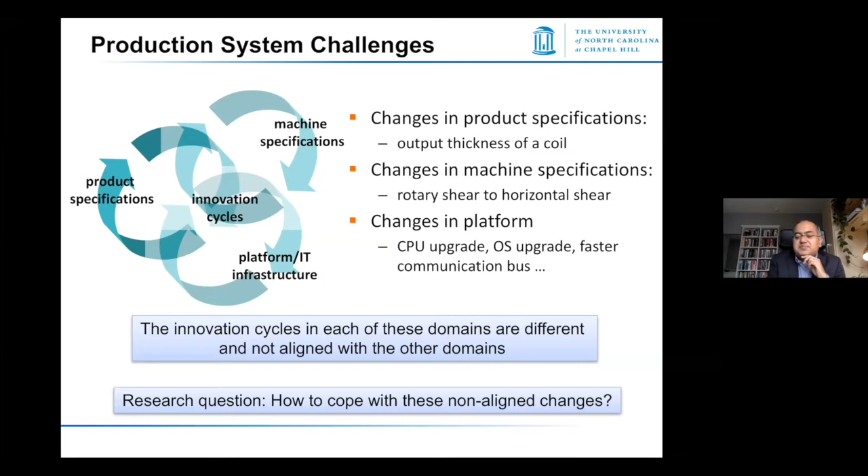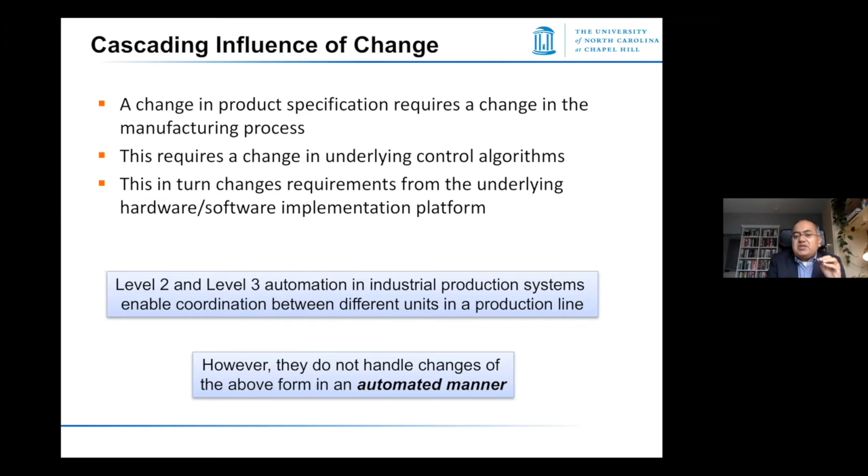In the industrial automation or production domain, there are level 2, level 3 automation techniques that are defined that enable this coordination between different units of the production line. But as this entire system becomes more complex, not just from the IT side but also from the machinery side, one of the main questions that the industry and also the academic research community is facing is: how do you handle these types of changes in a purely automated manner?

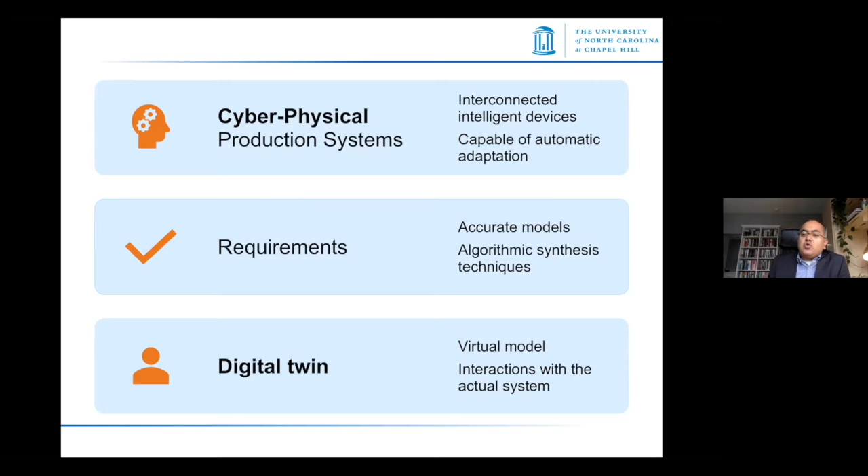This is what brings us to the concept of cyber physical production systems, where the picture is that we have a number of now interconnected but intelligent systems that are capable of automated adaptation. And what I would like to argue is that in order for this vision to work, you need accurate models, accurate timing analysis techniques, and algorithmic techniques that currently today do not exist.

So coming to the first problem, I don't think I need a big motivation to explain that for such a system to work, the underlying core of many of these systems are feedback control loops, where you have a plant, which in our case is now a machine that has to be controlled in order to achieve a certain production goal.

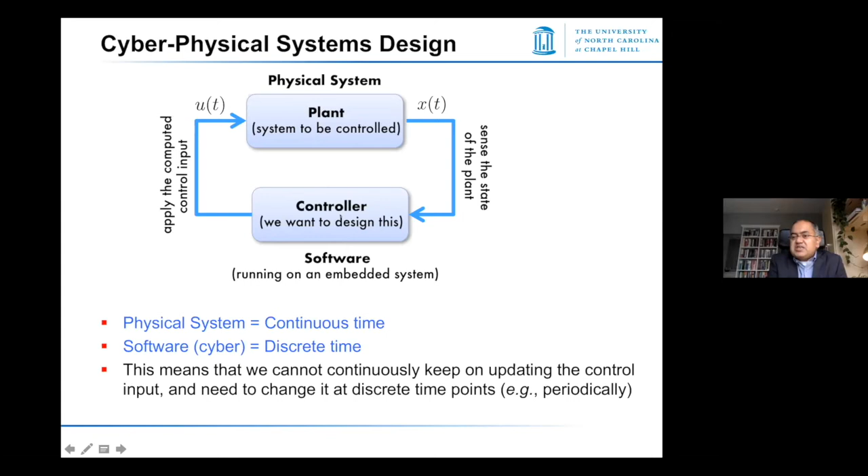I guess all of you in the audience know that such a plant is the physical system. On the other hand, we have the controller, which is a software entity running on the IT platform. The obvious disconnect between the two is that the plant works in continuous time and the controller works in discrete time. How do you reconcile this difference between a continuous time evolving plant and a discrete time evolving control?

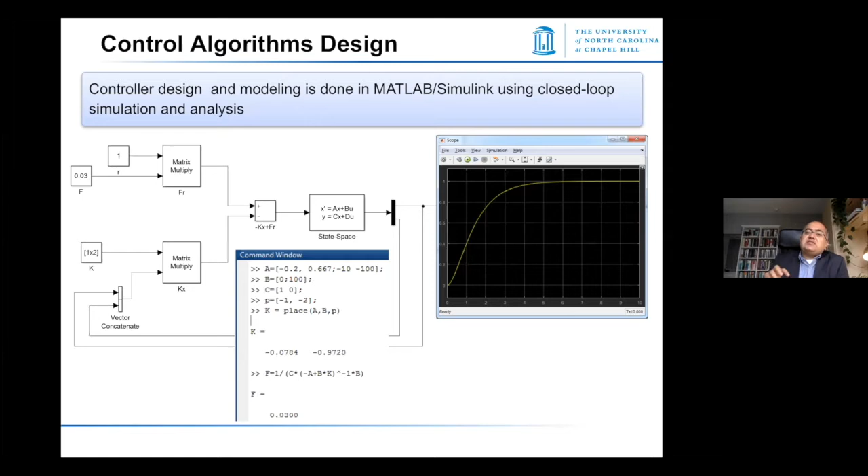Typically, we use standard control theory, and there are lots of associated tools, common among being MATLAB and Simulink, that you use to design your controllers. But whenever this controller is designed, it is often the case that for the control theorists, there is little view on the complex IT platform that exists today.

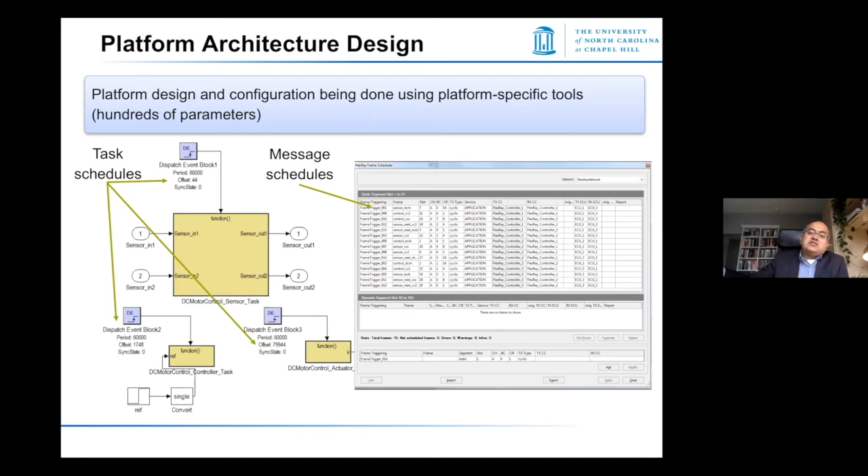As a result, there are the embedded systems engineers and the software engineers who design the IT platform, and they do this design process independently. Finally, in the last stage, when the controllers are integrated with these IT platforms, a lot of the idealistic assumptions that were made about the IT platforms by the control theorists do not hold true.

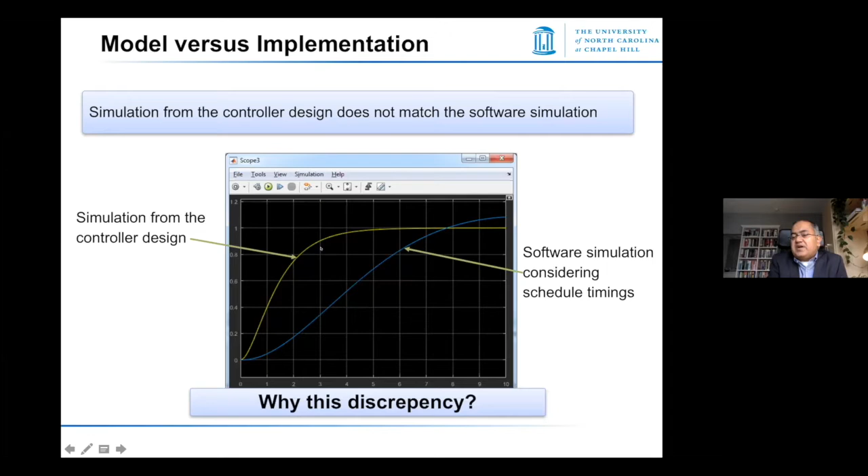For example, during the controller design phase, one might have assumed ideal timing behavior, but in practice, especially for complex IT systems, those timing behaviors are far from ideal. We see this discrepancy between the controller design expectation versus the performance we see in reality. This is a problem because of the modeling gap between the models used when designing the physical systems and controllers, and the actual models that exist in reality.

One of the ways to cope with this modeling gap is that one could have a partially specified controller and a partially specified IT platform and do some sort of co-synthesis. But to do that, we need detailed timing information of the IT platform, and I'm going to illustrate why that is a big challenge today.

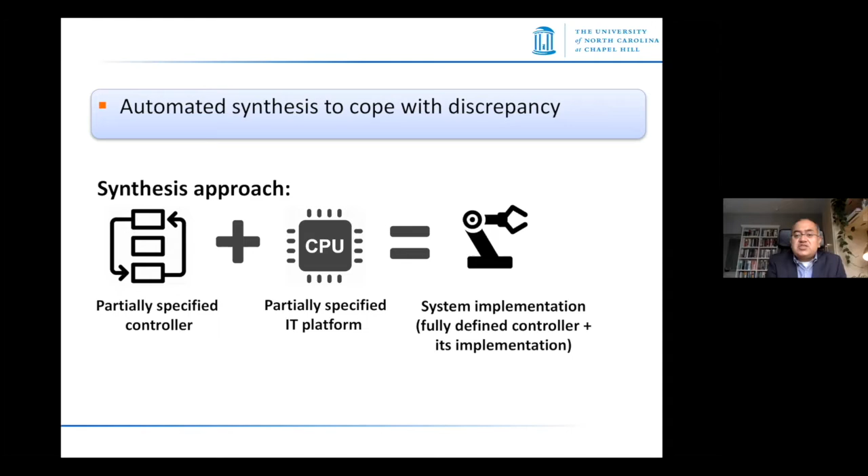In almost any automated and especially intelligent production system today, there is the following setup: we have a camera detecting the state of the system, and based on that state, you take a control action. This camera image has to be processed through an image processing pipeline, which today almost invariably contains some machine learning techniques. Because of their computational complexity, they cannot be processed in real time purely in software, so you have a lot of hardware accelerators like FPGAs, GPUs, etc.

Once this processing pipeline is over, a decision is taken and applied to the machine, which then goes ahead. This could be a robot arm picking something up, or a machine doing something, but its action depends on what the robot sees about the environment through a particular camera. So the correctness of this entire system is not just functional correctness, that the robot arm moves in a particular manner, but also that it moves at the right time.

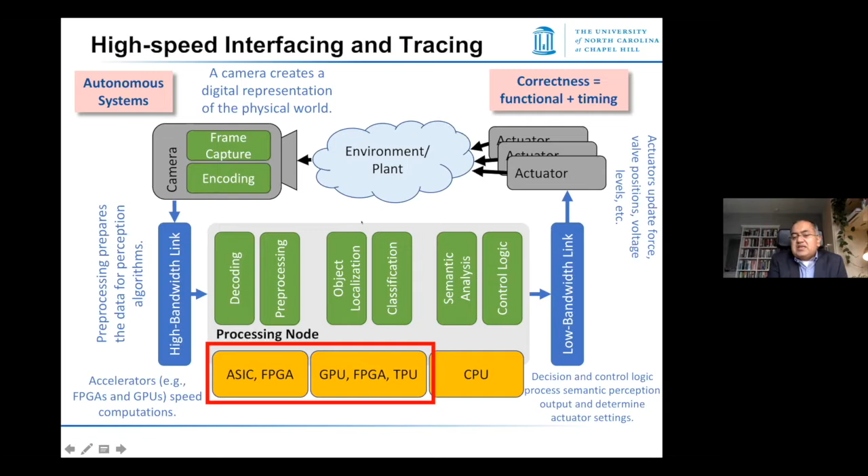If I play this video, you will see there is an Ethernet camera which processes frames at a very high frame rate of 178 frames per second. This cannot be done at this rate using purely software, so you have a large array of complex hardware accelerators.

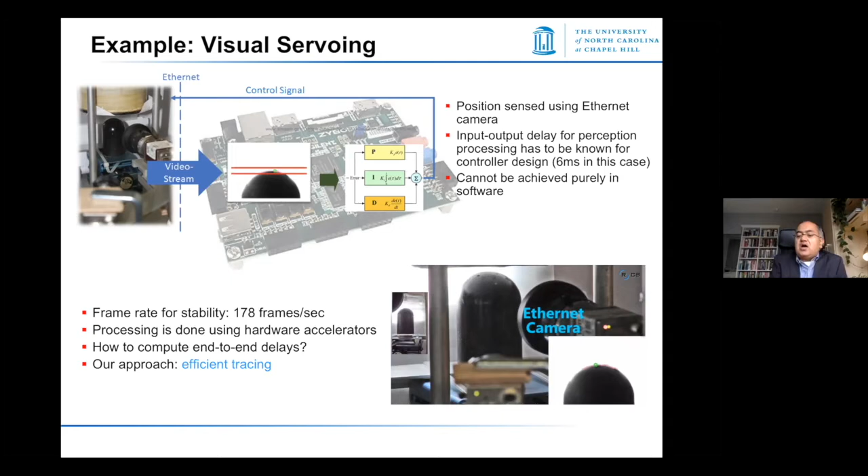The main question is that before you take the control action or design your controller, you would like to know the end-to-end delay between the time a frame is captured and the time a control decision is taken, where the system has estimated the accurate position of this levitating ball.

The processing in this case, although a relatively simple platform, is just a system on chip platform where you have a processing element and an FPGA. The main issue is that the data comes over this Ethernet port, and then this data has to be routed through multiple interconnects to the programmable logic, which is this FPGA fabric.

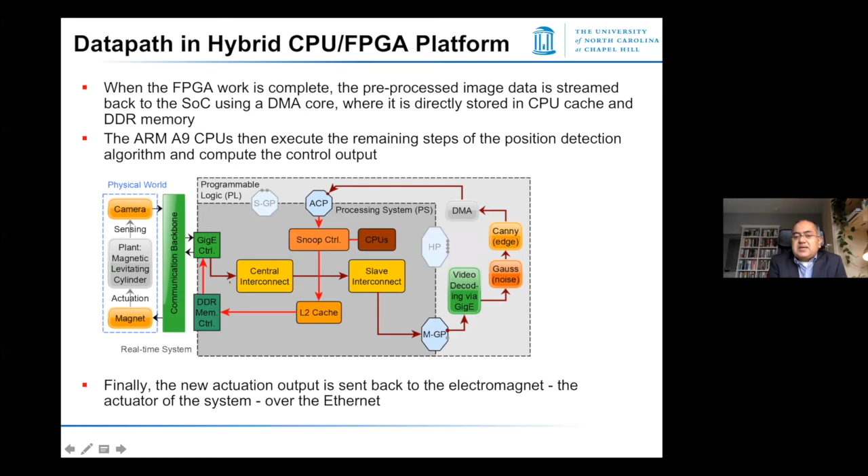In this FPGA fabric there are multiple algorithms, for example a Gaussian noise eliminator, a Canny edge detector, and so on. After this processing is done, the data goes back to the SoC, where the remaining processing steps are executed, and finally the actuation output is sent back again through this port to the electromagnet.

Now the issue is how do we estimate the accurate timing from the time the Ethernet frame enters to the time the output is reached here and goes into the controller. If you take a closer look at the system, there are really many things going on, but more importantly, even this relatively simple control task actually involves many tasks spread out across this heterogeneous system.

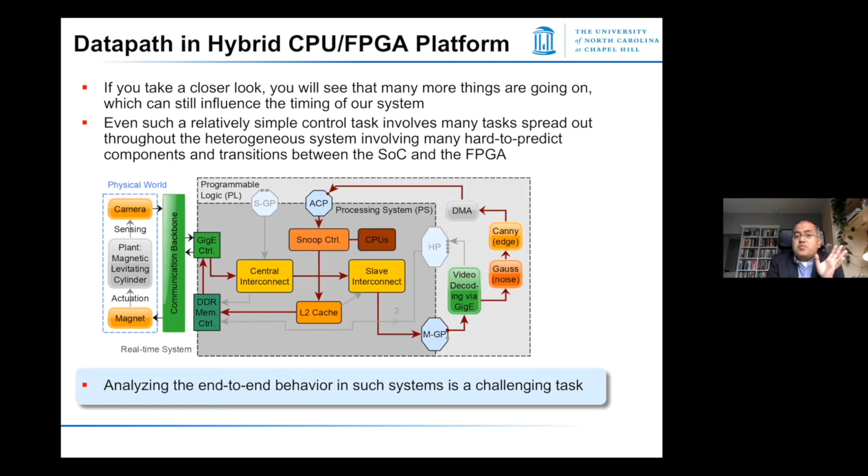There are many hard-to-predict components as a result of this transition between the system-on-chip platform and the FPGA. We've done some work on how to resolve this. There are design tools in FPGA design available to trace these details, but one of the main problems is that this tracing happens at a very low level of abstraction. As a result, a lot of data is generated, and you cannot monitor such a system for more than a couple of seconds.

But the main issue is that you might be interested in a much higher level of abstraction. You might be interested in only certain events. Currently there doesn't exist any tracing method where you could define those events and just monitor those particular events of interest, and as a result, monitor the system for a long enough time.

Of course, you cannot analytically or mathematically model all of this and do accurate timing analysis. One technique we've come up with is to put in a trace core, a very small part of this FPGA fabric, where you can define the level of abstraction at which you need to monitor things, and monitor only those particular events at a very high level of accuracy, as you can see on the right-hand side. You could get detailed timing information of particular events of interest, and use this information to get timing data that can be used to run your control algorithm.

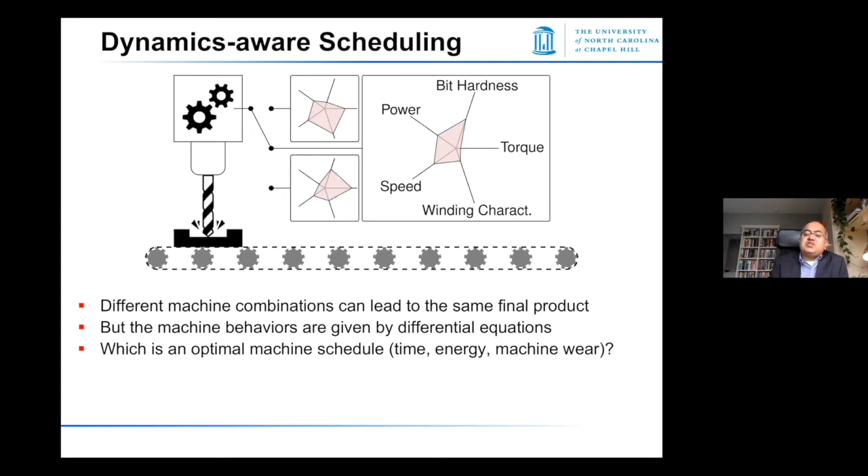As a result, we have the following scenario: we have M1 to Mn at the different machines. This is at stage 1, again the same machines at stage 2, and again the same machines at stage 3. All we need to do is start at a particular machine, say M1, and at the next stage decide what is the next machine, and at the next stage decide what is the next machine, and so on until we have the finished product.

The main issue here is that the processing in each of these machines is defined not just by execution time parameters, but by a set of differential equations. So given this space of different differential equations controlling the different machines, the problem is how do you determine each of these mode transitions such that you reach the final state, which is the desired state of the product, and optimize metrics like total processing time, total heat generated, or energy consumed, and so on.

Now, this is a classic hybrid systems problem, where you have multiple continuously evolving states and discrete transitions between them. Very easily, depending on what kind of differential equations you have and what conditions allow state transitions, this problem becomes undecidable. So one possible solution is that you discretize this entire space.

And of course, in order to accurately capture the system, you'd like to discretize as fine as possible, but then that results in a state space explosion. Whereas if you discretize in a very coarse manner...

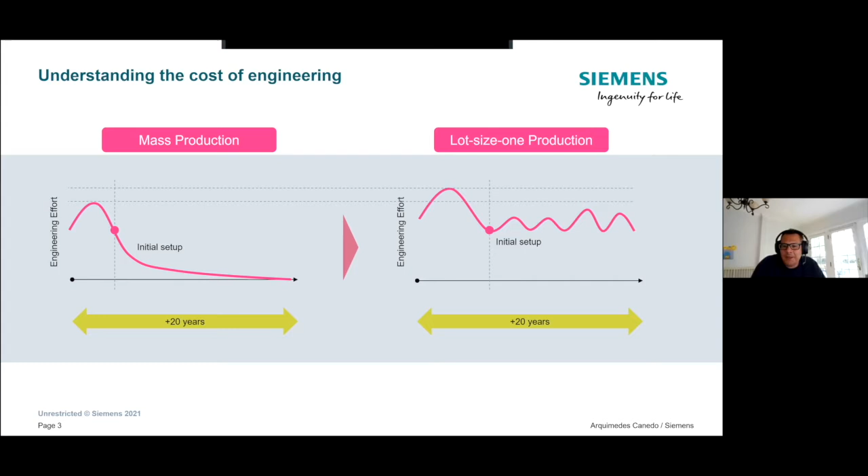We hear about digital twin, sensors feeding back all that good stuff to design and optimization, but engineering is as important as the product itself, as the runtime. So just to illustrate this, we typically think of digital twins from the product point of view. Think of it like a watch. Yes, we can digitally create and test products, and we only think of that product, in this case the watch, once it's being used.

But I think where really the power of digital twin gets unleashed is also that we can digitally model and create these production systems, and see all that monitoring on the machines themselves that are producing that product. So we like to see it as this horizontal axis where you have the product and the production digital twin that, in a way, intersects the product. And only when they intersect is when the production creates that digital product.

I think the important thing here is that the same loops that we see in product, on optimization and improvement, we can see them in production. But more importantly, one of the points I want to make is that the interplay of the two is something that you don't see very often discussed. So the choices that you make, especially if you're creating one-of-a-kind products, the production machine needs extreme flexibility and adaptation, and we need to engineer all that stuff.

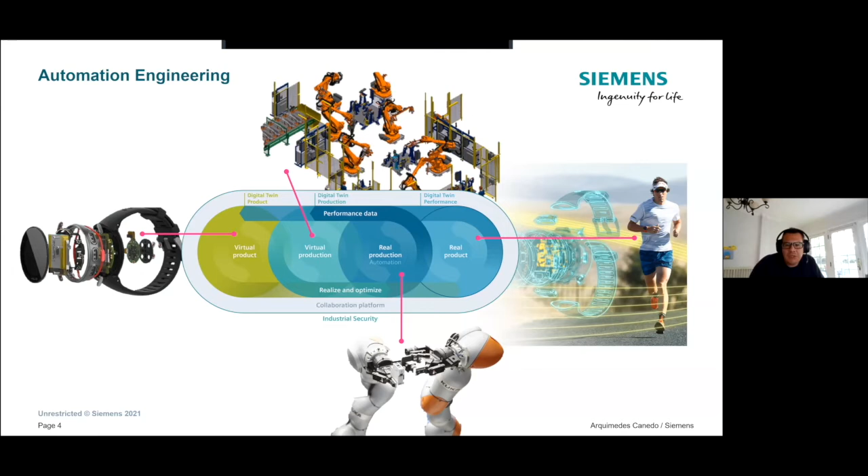So just a glimpse of where we're at today, and this is a little bit to talk about the problems. I just put pictures of many of our tools that let us create both product and production digital twins. Now, obviously there are integrations between them, but we are working, and this is the challenge not only for Siemens but for everybody else, to start creating more interoperable digital twin creation tools.

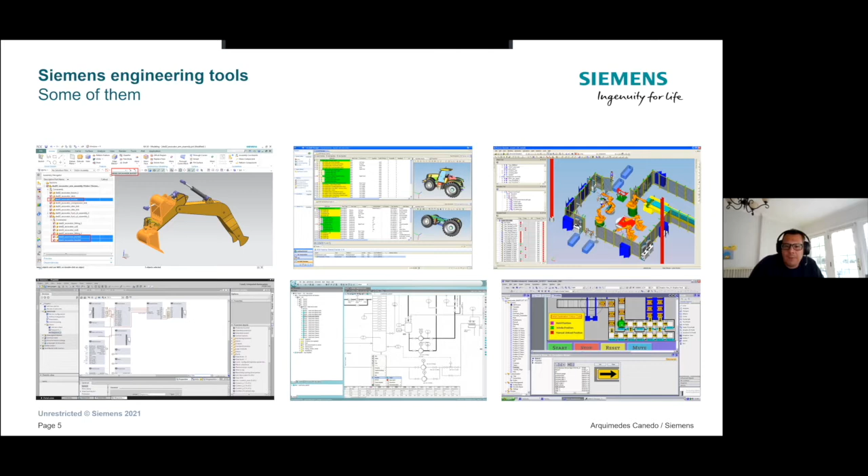So here, what you see on the screen is all engineering. We're creating stuff, we're preparing both the product and the production. But as we discussed before, the cost of engineering is very high. So what we've been doing for the last 2 years is something that we call cognitive engineering.

And here the idea is the use of AI, artificial intelligence, and here not only machine learning but also formal methods and other forms of AI. The goal is to reduce the engineering effort. It is costly, it is difficult, and we want to address that. So what we've come up with are proof of concepts, and this is just one of them.

We call this the ArduCode. The idea here, what you see in the middle, is this proof of concept that we created is attached to our tools on the left, that's for PLC programming, and on the right for production scheduling and simulation, production planning.

And here, the cognitive engineering system in the middle is constantly monitoring different projects that we've created in the past and picking up patterns, all driven by a knowledge graph or a knowledge base. And what we're trying to do here, and we've demonstrated that it can be done, is code classification, trying to reuse code based on functionality.

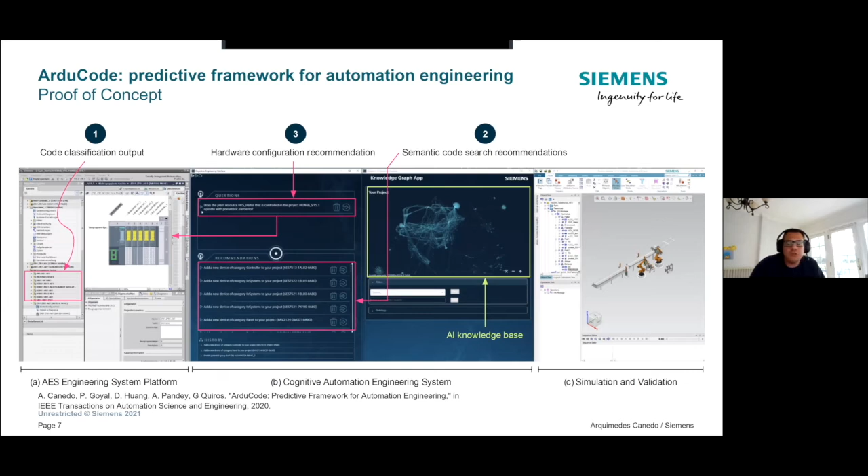Number two, semantic code search recommendations. If you see a hardware pattern being implemented, you can associate this piece of code that controls it. And third, the hardware configuration. For example, the use case that we have is that if, because of the structures, you detect that this requires a higher safety level, you can recommend an additional PLC to cope with that requirement.

Also, very importantly in engineering, we have an aging workforce. That happens all the time. We're humans, we only last, if we're lucky, 80 years. But as our engineers retire, we need to train the new generation. Capturing that engineering knowledge is critical. That's what makes the difference between an experienced, proficient engineer and someone you just hire from university or school. So what we've been studying is that as engineers create structures in the engineering tools, we can mine these structures to predict what makes the senior engineer more efficient and more knowledgeable than others, and capture this pattern so we can recommend it later to newcomers.

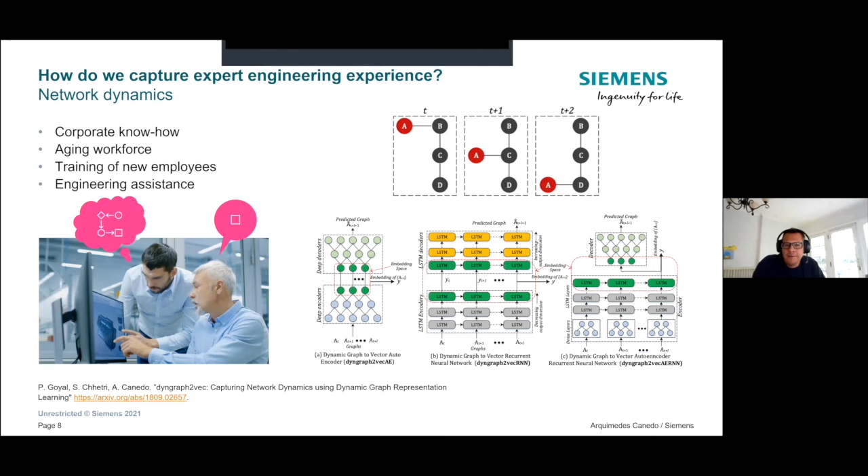So with that, I'll close up, and I want to emphasize three key takeaways. One, engineering accounts for about 50% of the total cost of automation, so it's as equally important as the runtime. Two, please pay more attention to engineering. And three, as you pay attention to product digital twins, start paying attention to production digital twins. Thank you for listening in, and I'm looking forward to the discussion.

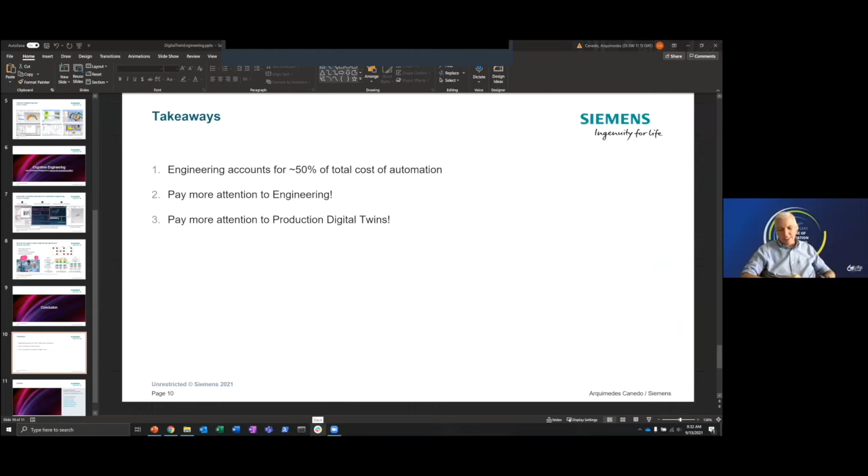Thank you, Aki, for also this very nice perspective on how you do it in industry. And now finally we go to the next panelist, Franco Fummi, who also worked in this digital twin area with production systems. We have also a short lab visit, but I will not say so much because Franco, this is your turn, so you can already start.

Okay, thank you, Achim. So my presentation is about a research facility for Industry 4.0, where at the core there are digital twins, as you will see in a demo that we will do at the end of my presentation, a live demo.

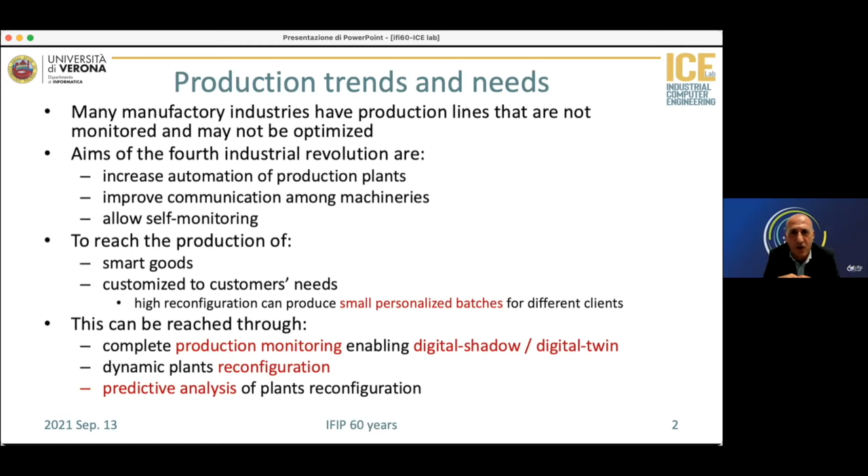What can we say about the flow that produced the digital twins I will show you? If you consider production trends and needs, we can see that the current production trends and needs are sensibly different from those of 10, 20, 30, 40, 50 years ago. Particularly, we can consider that all goods are now produced in small personalized batches, no longer in large unpersonalized batches. So it's fundamental to create correct monitoring of production, and this could be enabled by using a digital shadow, which is a particular kind of digital twin. Particularly in the case you are able to dynamically reconfigure the production, this dynamic reconfiguration goes in the direction of having predictive analysis of plant reconfiguration, which is a topic on the border between Industry 4.0 and what is already called Industry 5.0.

But first, let me say something about what we succeeded in putting together in our research facility. We started from all the typical enabling technologies of Industry 4.0. We realized that all these technologies are based on computer engineering, but computer engineering is not exactly what there is at the core of the majority of production plants. We find there a lot of different engineers - mechanical engineers, control engineers, electronic engineers - but not a lot of computer engineers. And particularly, all the methodologies used in computer engineering in past decades for designing software and systems must be applied in the context of industrial computer engineering.

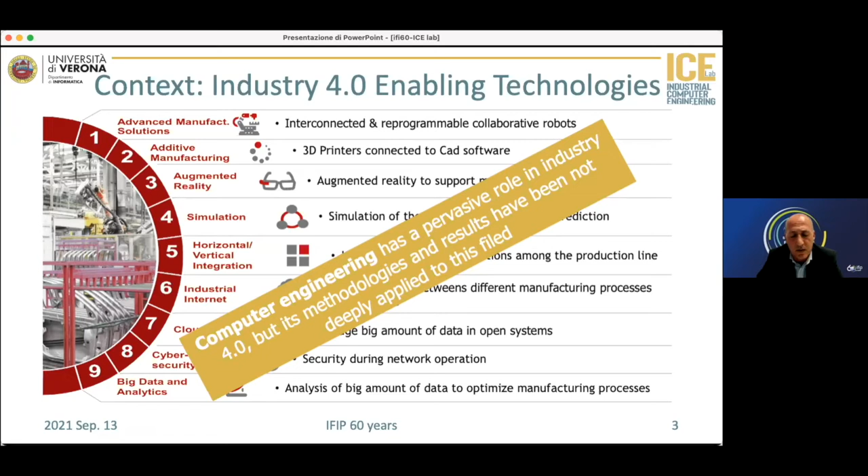So the target, goal and mission of the laboratory we created is exactly to try to identify a way to port all such methodologies and knowledge into industrial computer engineering. We succeeded in doing it only because we received huge funding from our education, university and research ministry - 8 million in funding - and this has been used for some activities, but also to create a laboratory.

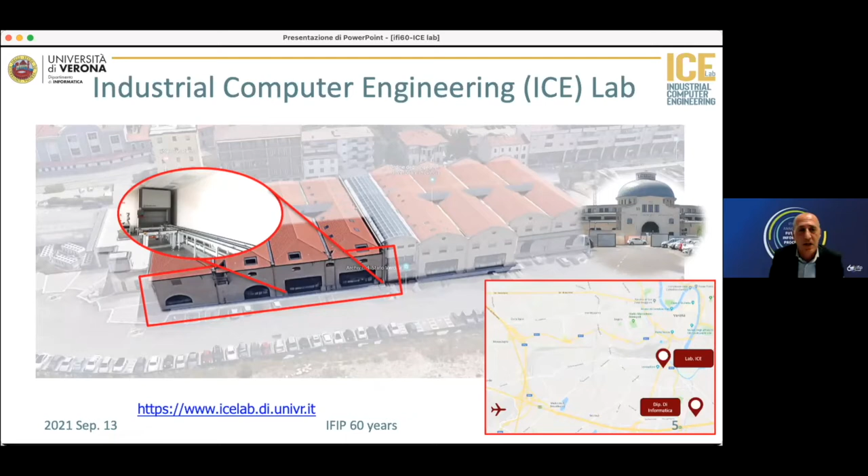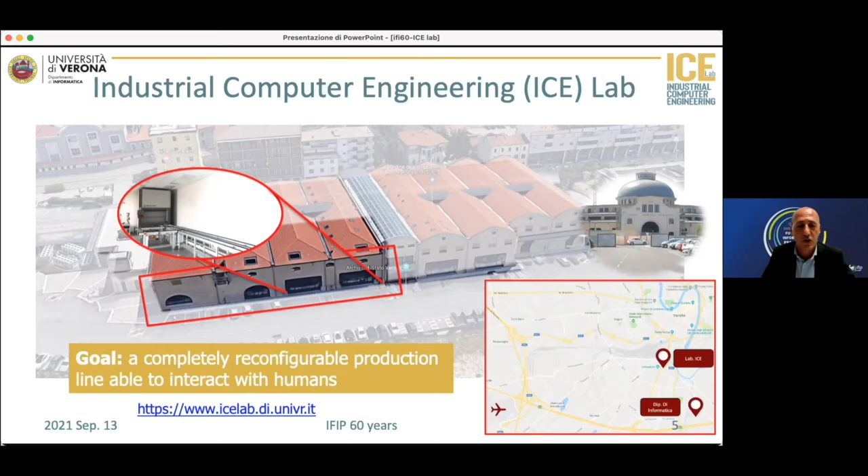The laboratory is called ICE, Industrial Computer Engineering. Here is the website if you are more interested in the content. And the goal is to create a completely reconfigurable production line, be careful, able to interact with humans - this is the new frontier, interacting with humans of Industry 5.0. It is exactly what we are going to do in the next years, after the first stabilization of the production line that will implement all the main characteristics of Industry 4.0.

And the interesting thing about ICE is that it is a so-called demonstration lab. So what is a demonstration lab, and why could it be a bridge between academia and industry? Because a demonstration lab shows the state of the practice, and the state of the practice must be there. But then, on top of the state of the practice, we are doing teaching, so we are doing specialized teaching, and we are doing research.

So it is a real need of companies to identify an intermediate position between the direct offer of companies like Siemens, for sure, and the ideas of universities. The ones from companies are focalized to the target project and so on, and they are perfect for sure, but focalized to one direction. The ones of the universities are, in the majority of cases, proof of concepts. So we need to identify an intermediate point.

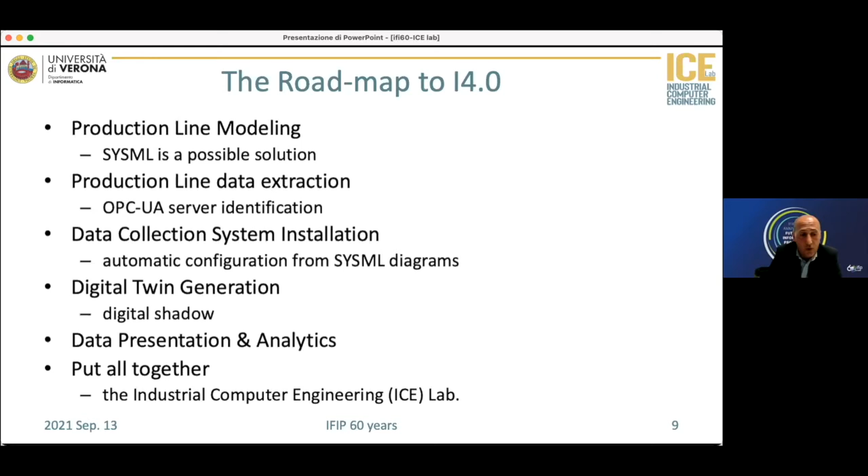You can also extend in the future your digital shadow to become a digital twin. Then for sure you have to present data and perform analytics on top of them. If you put all together, you arrive at our industrial computer engineering lab.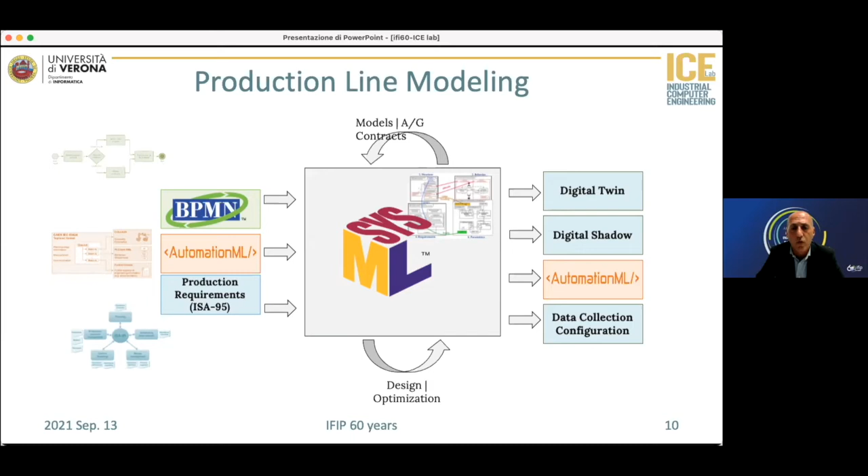From this, we can start to automatically or semi-automatically generate the pieces of the roadmap I showed you before. For example, in the case of data extraction, you have to solve the problem of different protocols. You have to mix together what we know as IoT with industrial IoT, which is a different flavor more related to industrial production. You need, for sure, a gateway.

But if you don't want to go crazy, you need an automatic way to generate the data structure in order to collect data, to arrive at an architecture that should eventually be cloud native, so you can move it from your PC to an industrial PC, to a large PC, to a cloud, without being constrained to redesign all the software. In the case of data collection architecture, a good idea is to avoid putting all data into the cloud.

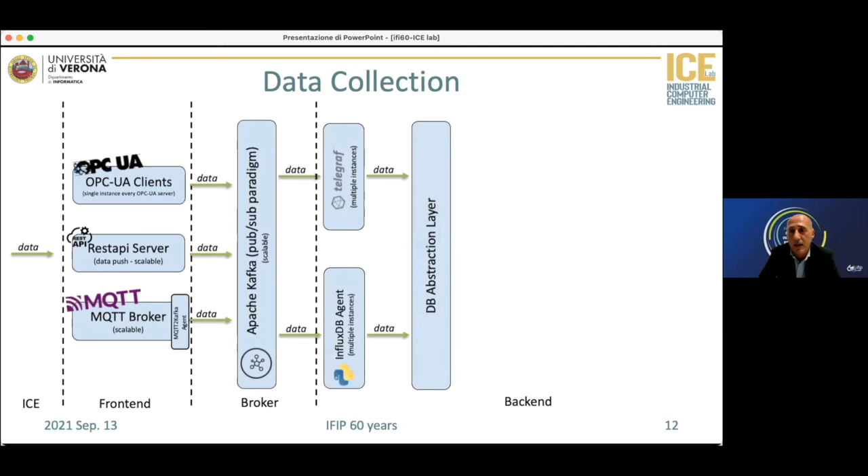You can do it, but it costs a lot and it's useless. You have to identify different layers, and in those layers, remove useless data. You unify the data from different sources, and then when they are ready, you can put them into your favorite cloud. On top of this, you can model your digital shadow.

We use, for example, the typical simulator from Siemens to perform this. We extended it by mixing different levels in order to have different digital twins, because sometimes we use the term 'let's generate a digital twin,' but there is not only one digital twin—there is one digital twin for each problem.

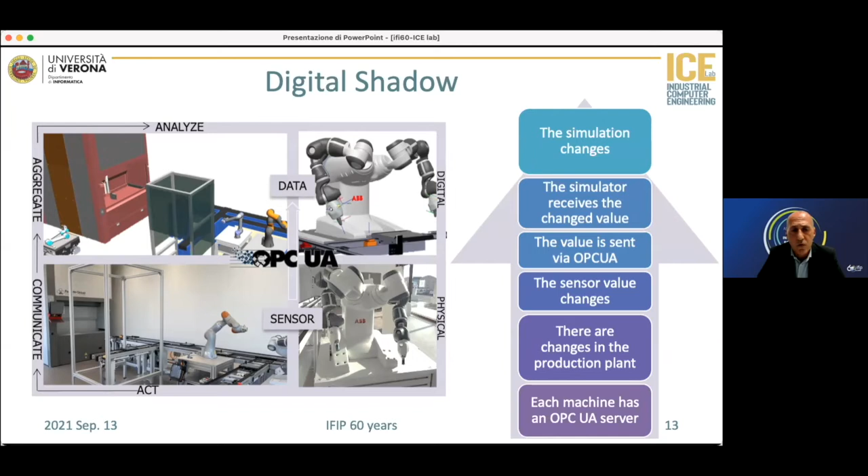Depending on the problem you have to solve, you need to identify the correct level of abstraction, the correct set of data, the correct computational model, and so on, in order to identify exactly what you would like to simulate. At the end, you have to collect all the data to present it with some analytics tools.

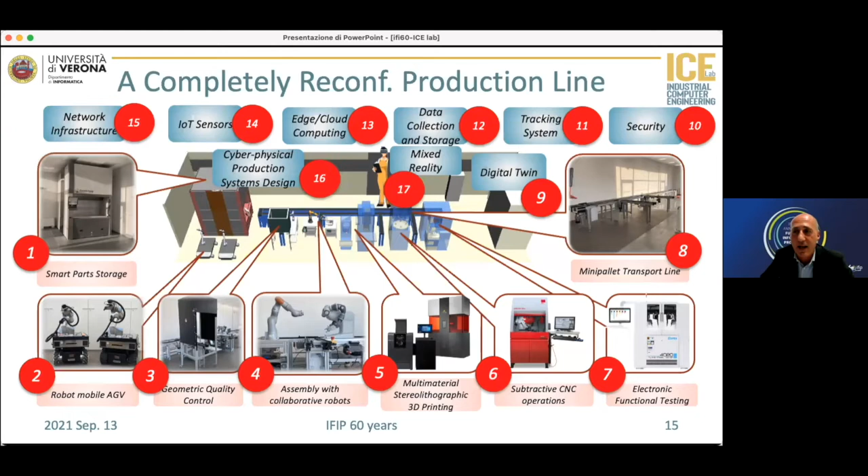With this slide, which summarizes the laboratory, I would like to pass the word, the token, to my colleague in ICE Lab in order to show directly a live demo of what we have.

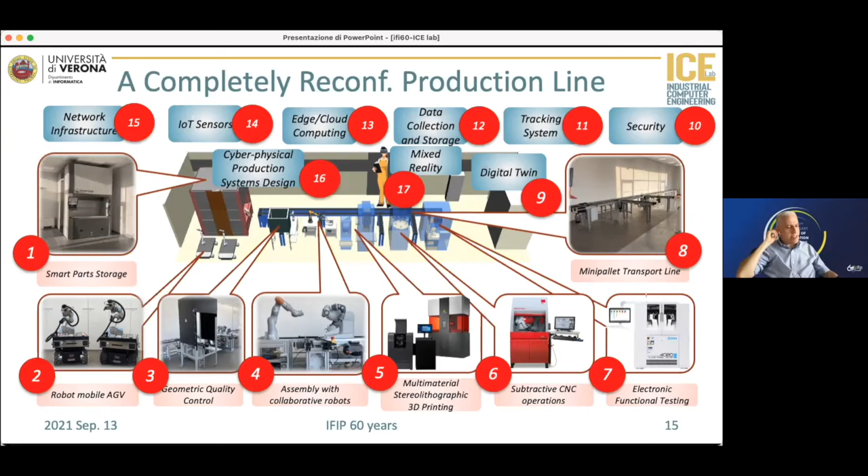Okay, welcome again to the ICE Laboratory. Before I show you the digital twin of the lab, I'll show you a real brief tour of the real lab. We have the lab divided into working cells.

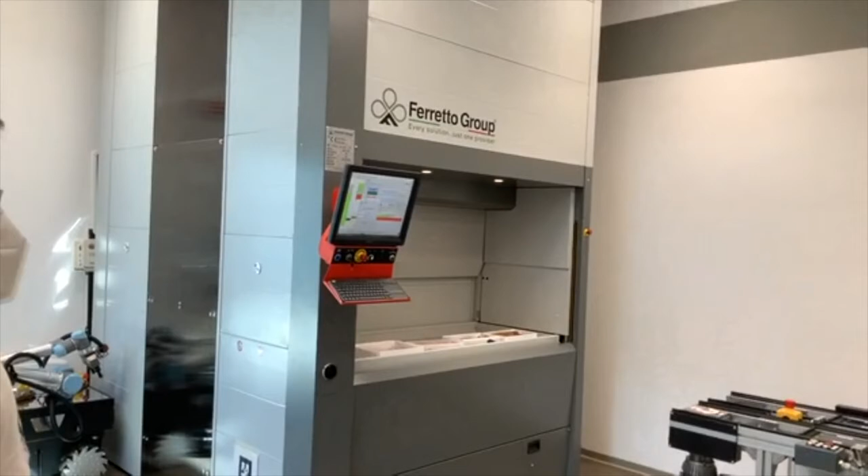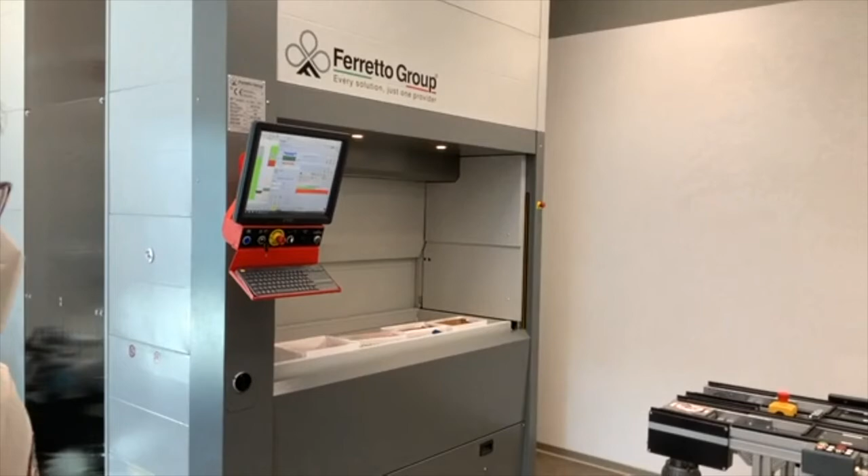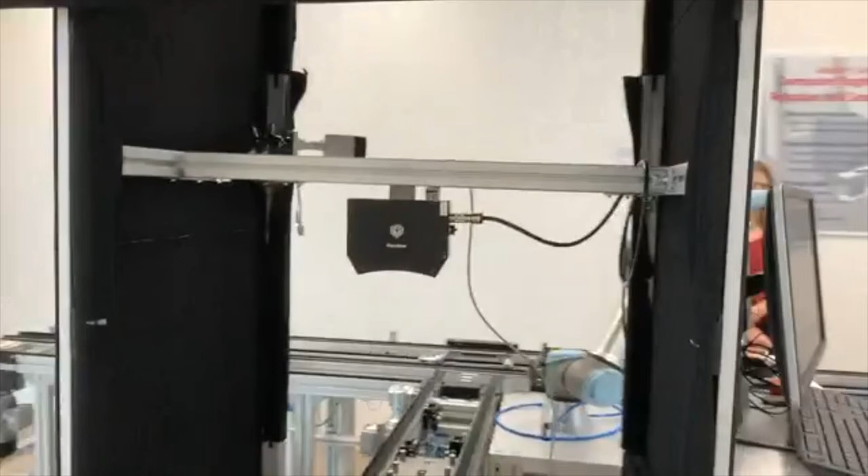The first one is the Ferretto warehouse that we use to store our production pieces and the pieces we need for our work in the laboratory. Then we have the transportation line, which is a mini pallet line in conjunction with a smart mobile robot. Then we have an optical quality control station, made up of cameras and a powerful PC.

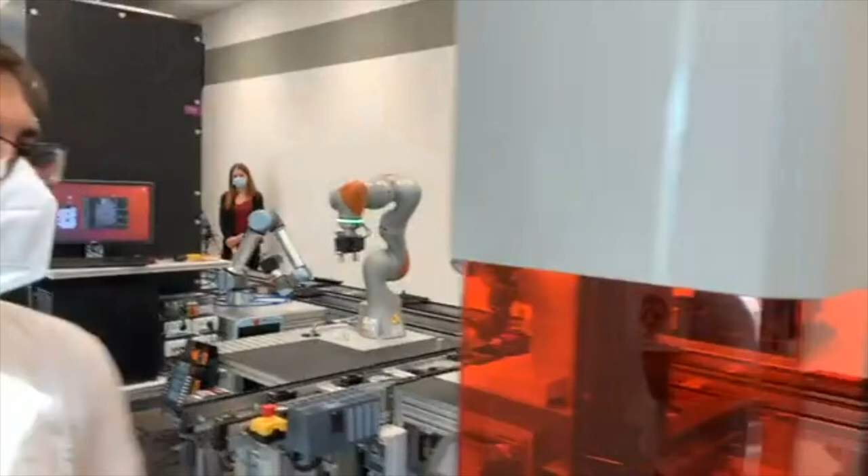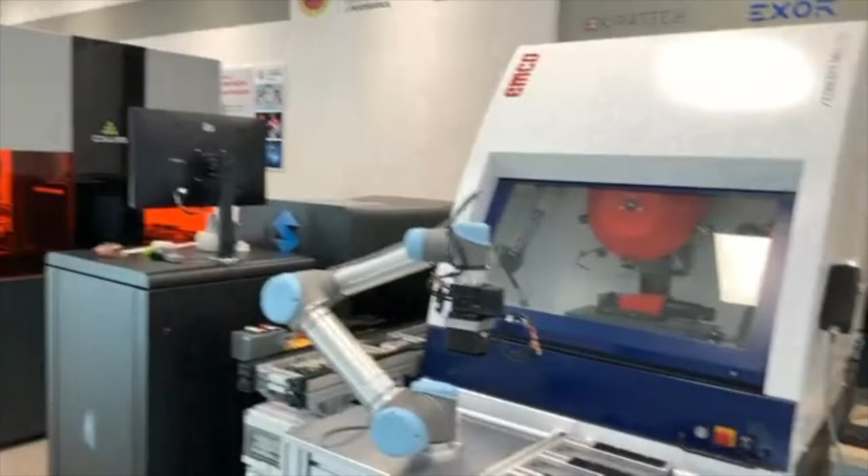The robotic assembly and disassembly station is working now, doing our recipes. Then the 3D printers—we have two of them with different technologies. The subtractive manufacturing station is a milling machine in conjunction with robots, which we are working to integrate into the laboratory.

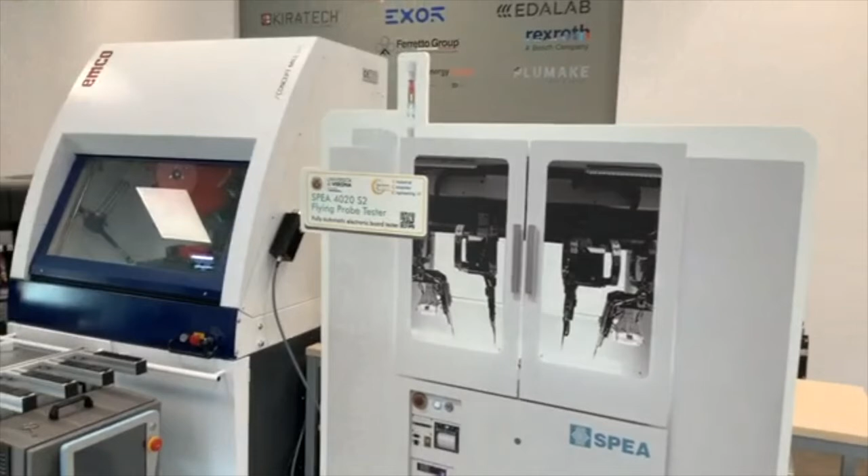And then the future part of the laboratory: the flying probe tester, to test and do automatic board testing—something we will do in the future.

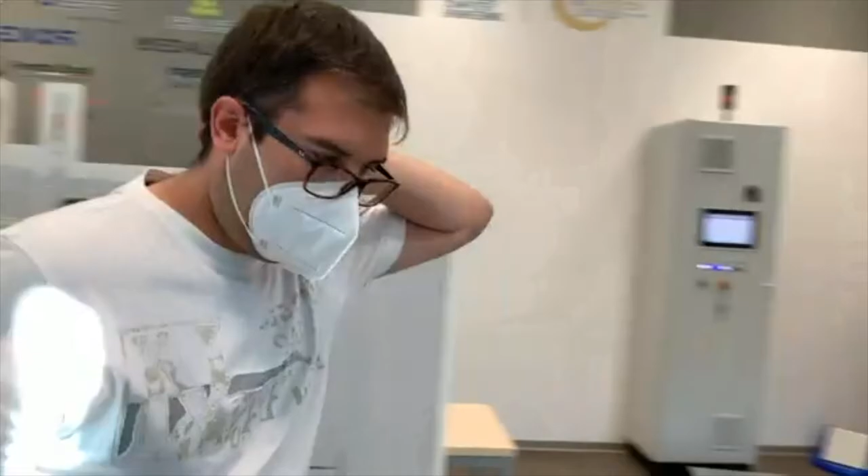I'll show you the digital twin with a screen share. Okay, you should see on your screen our digital twin. The digital twin shows the data flowing from the production line.

For example, on the warehouse, you see the current tray that is on the bay. From the optical quality control, we see the last event, which is a correct quality control. From the robot, now you see an empty cell, but when the robot places the Lego pieces in their buffer area, you can see the state of the cell. Finally, you can see the mini pallet flowing on the line, in its state and in its position.

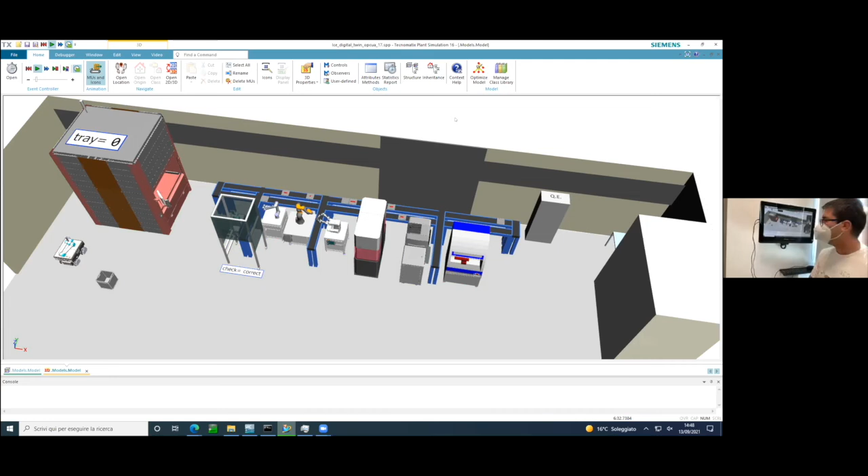Our digital twin reacts to changes on the line. For example, I can show you, if Marco is going, that if I stop this mini pallet on the digital twin, there will be a waiting, and the pallet at the end of the line doesn't come up. Then, when I release the pallet, the digital twin shows exactly the pallet flowing on the line.

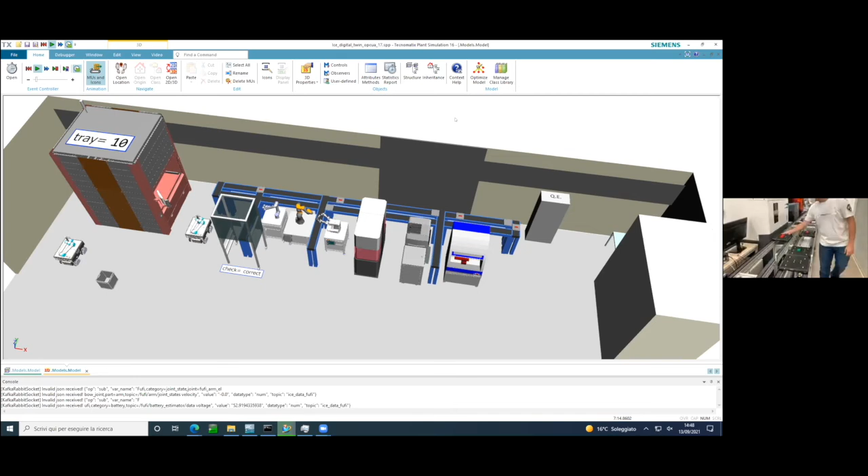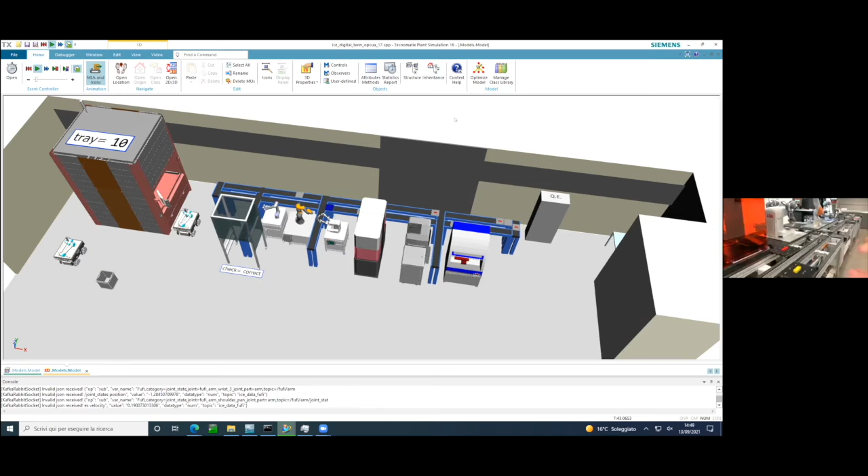But also, if I extract the pallet from the line and put it at another point, you will see that the digital twin shows up a blue pallet. Then, the first time the pallet reaches an RFID sensor, the digital twin recognizes it and inserts it again in the line with its contents on top. Okay, you can see in the digital twin that the pallet switches from blue to the normal state.

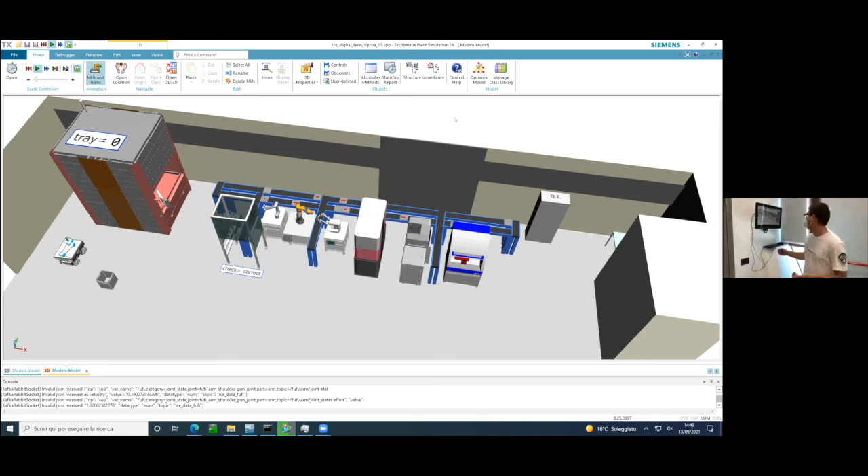This is possible because all the machines we have in the lab have an OPC server from which we can collect the data, and we can use it for controlling the plant. Also, the data collected from the machines flows into our data collection architecture, which we use to store the data.

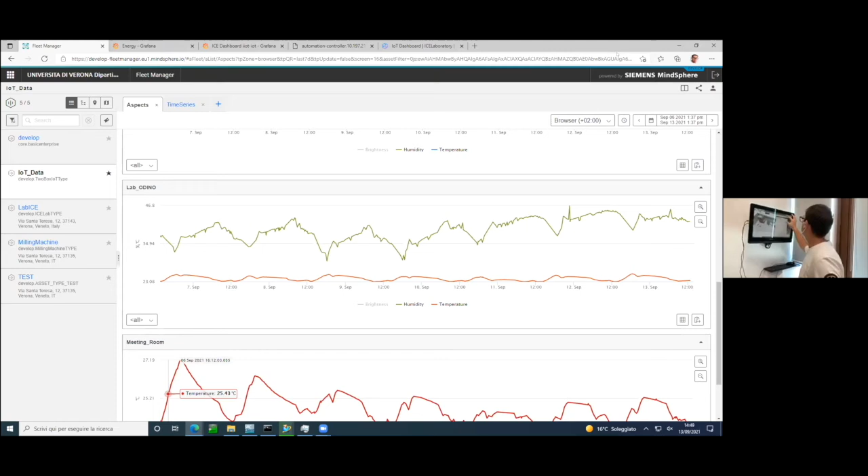Can I reduce this? The zoom bar is over the tabs. I have a problem with the zoom bar. Yeah, no worries, let me extend it.

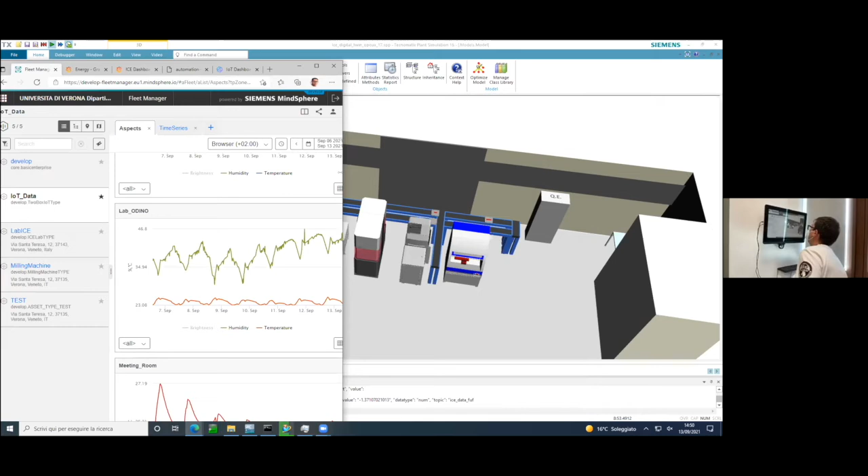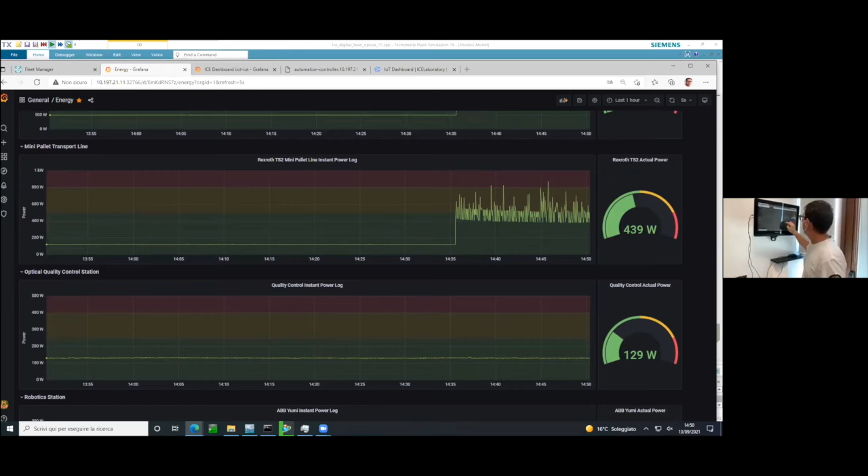Okay, so here we can collect the data and show you some of it. Here is a dashboard showing the actual power used from the ICE laboratory and from each of our controlled, connected machines. Then I can show you another dashboard where we mix the data from the environment and from the plant.

For example, we are showing the data of the ambient environment, where we show the illumination of the laboratory, the temperature of the laboratory, and its humidity, at the end of the production line and at the start of the production line.

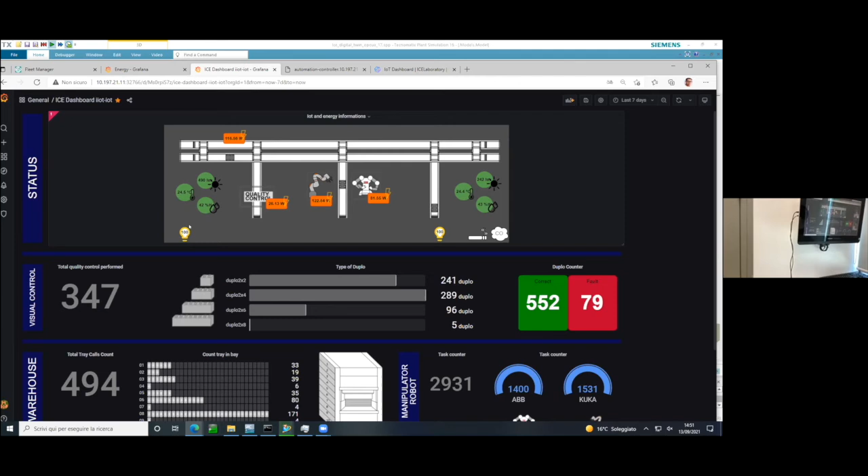Then we can show in real time the consumption of the pallet line, the quality control, and the two robots. And this is the state of the ambient lighting. So we are using 100% of the lighting power of the laboratory.

Downstairs, we are showing information from the past activity of the lab. For example, how many times each type of Duplo has been recognized by the visual control system, how many quality controls have been performed, how many correct pieces have been processed, and how many fault pieces we had in our production.

Of course, we have other data. For example, about the warehouse, we store how many times each tray has been called, and in this area, how many times each robot has been called in our recipes.

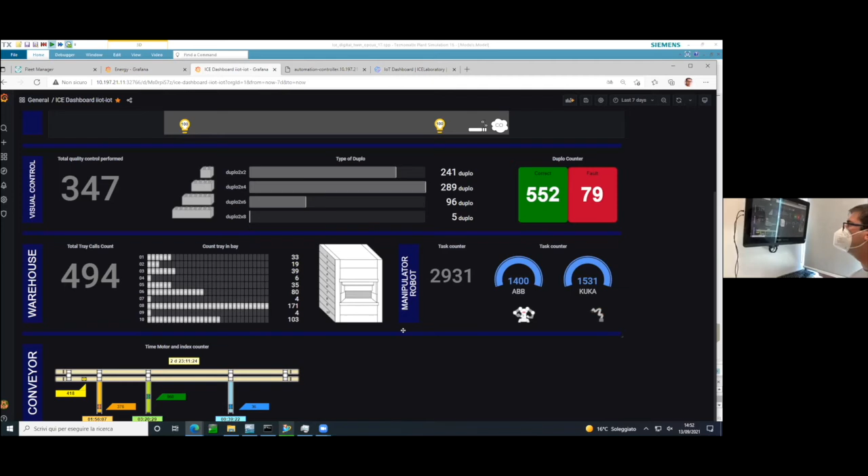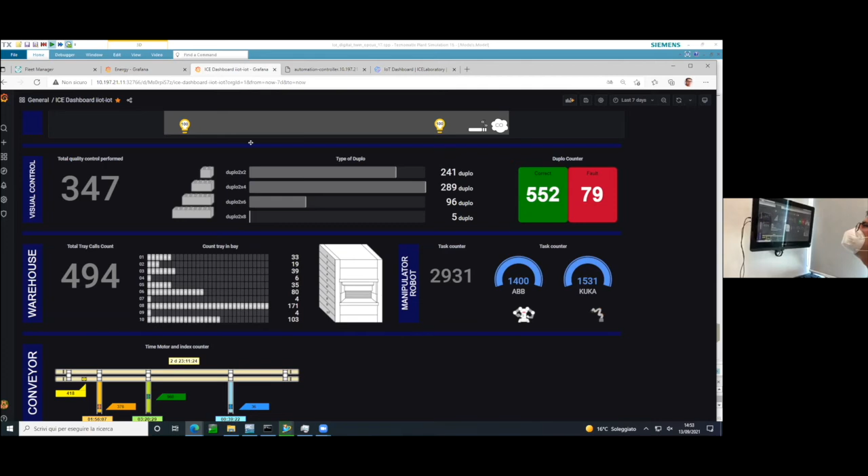And finally, we have some counters about the state of each element in the conveyor. We show only a few of them. For example, how many times we switch a piece that locks the pallets on the conveyor, how many times the belt of each bay has been moved, and how many times the motor has been on for each belt we have on the production line.

We store all this data on this database, which is InfluxDB, and is fully optimized to store time series data.

We are collecting a wide range of data, and here you can see raw data about our buildings, the temperature of the ICE lab and of the room near the laboratory, and its humidity. In this case, it's the other lab we have here in this building.

Finally, we have a cloud part of this architecture. In fact, not all the data—we cannot push all the data to the cloud, but we do some pre-processing.

For example, you can see from the previous dashboard that we have two points where we measure temperature in the ICE lab. Before pushing this data online on Siemens MindSphere to make it available to a wide range of customers, for example us and our students, we take a mean between them and show only one line of data, which is undersampled compared to the original time series.